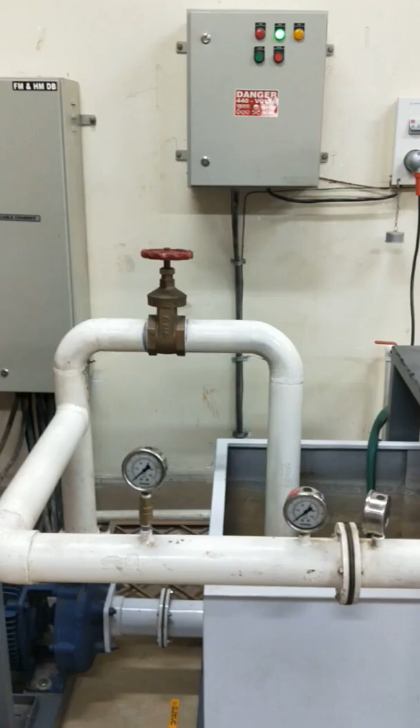So here is your machine. First of all, check the main switch position. It should be in off position. Then fill up the tank with water and ensure that at least 75% of total volume of tank should be filled with water.

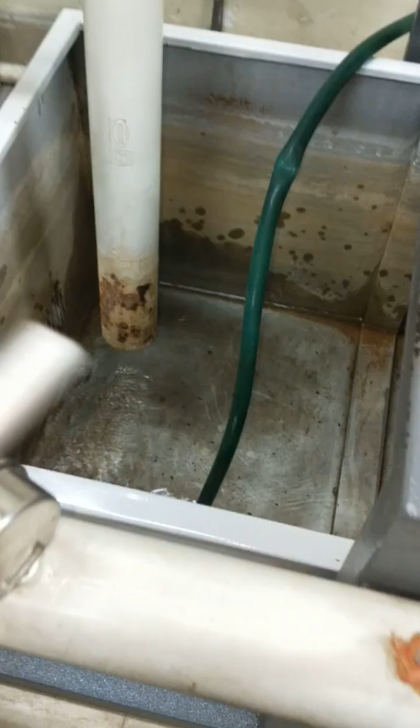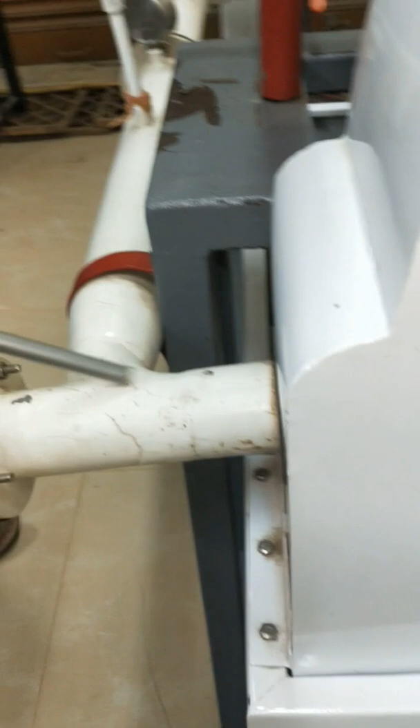By controlling this spear wheel, we can allow maximum amount of water to flow through this nozzle section. This is a spear wheel, and we can control the flow of water through nozzle by controlling this spear wheel.

And this is your bypass valve, and it should be kept fully open during the start of your experiment. And here is your observation table. For first reading, this one is P head or pressure head. We can get these values from this pressure gauge.

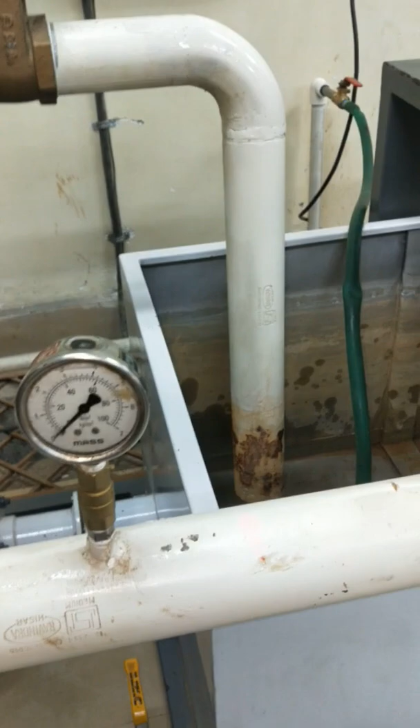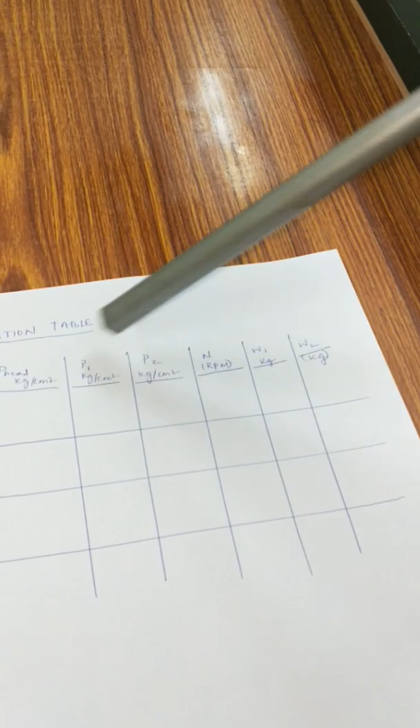And then your P1 and P2. These values, P1 and P2, we can get from these pressure gauges at the inlet of the orifice and at the outlet of the orifice. And then your RPM, speed of your turbine. RPM, we can take this reading by using a tachometer at this point.

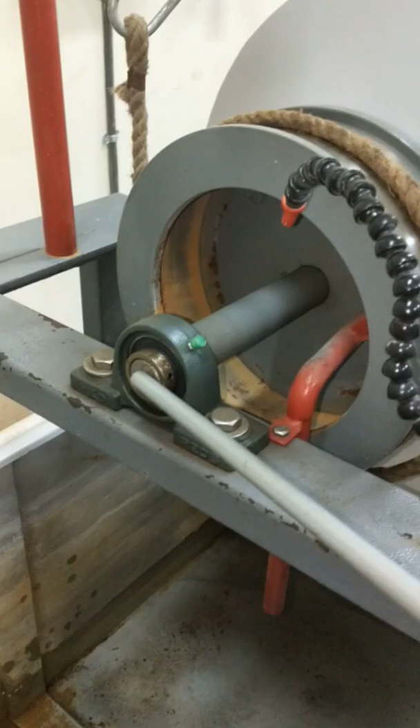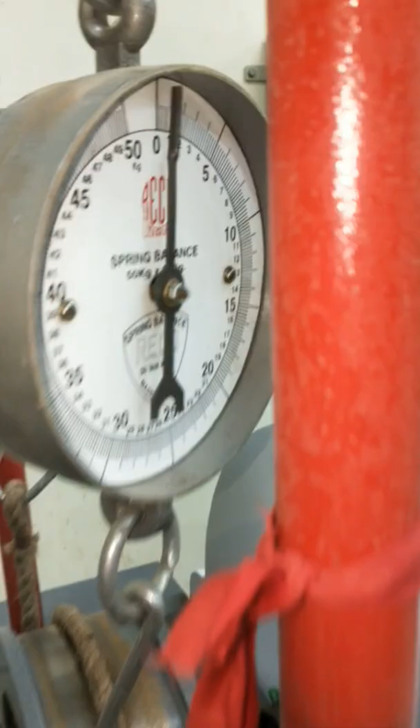And then your load part, W1 and W2. W1 and W2, we can get these readings from this spring balance or your rope brake dynamometer. This value will show W1 and this is W2.

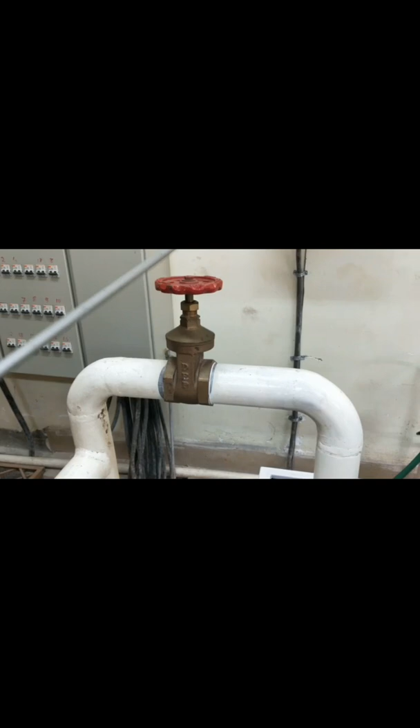So here is your machine. You can see the tank has been filled with water, and the main switch is at off position. And keep this bypass valve fully open during the start of your experiment. Keep this bypass valve fully open.

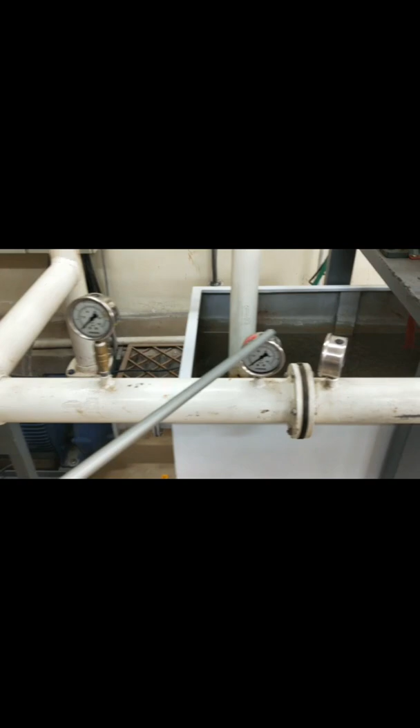Now we will take readings of P1, P2, and from here your RPM, W1 and W2 for 3 different pressure heads. This pressure head can be changed by controlling this bypass valve. So here is your observation table. And now we will start the machine and take 3 different readings.

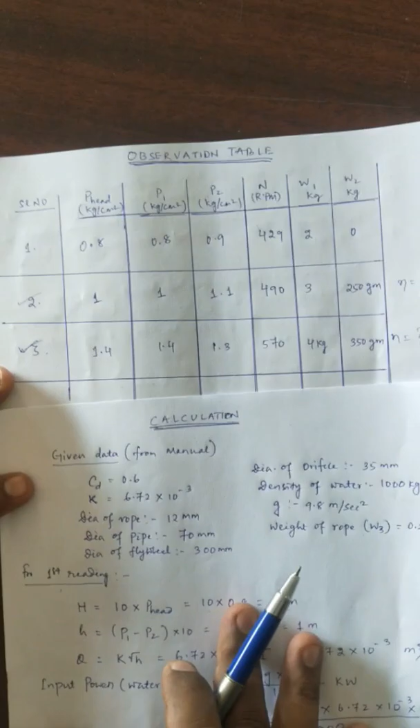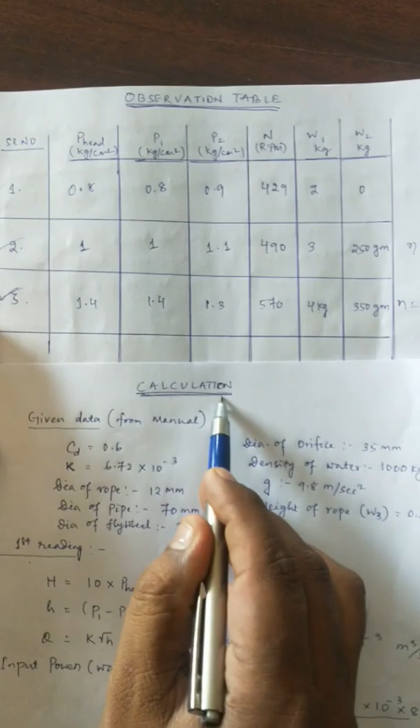So here is your observation table. We got these readings from conducting this experiment, and here is your calculation part. For reading 1, for serial number 1, here is your calculation part. These are the given data: CD 0.6, K value 6.72 × 10^-3, diameter of rope, dia of pipe, dia of flywheel. These things are already given in your manual.

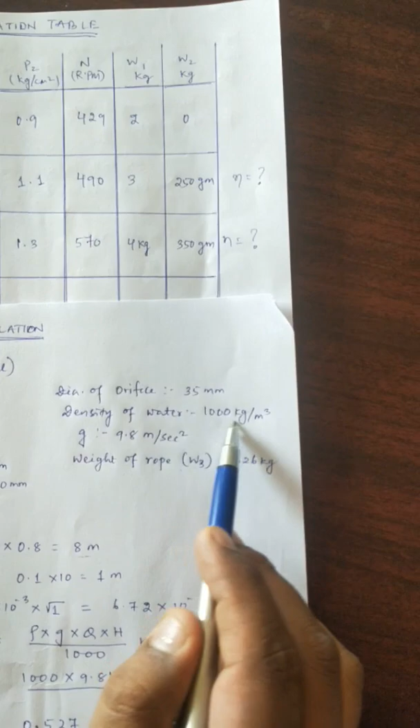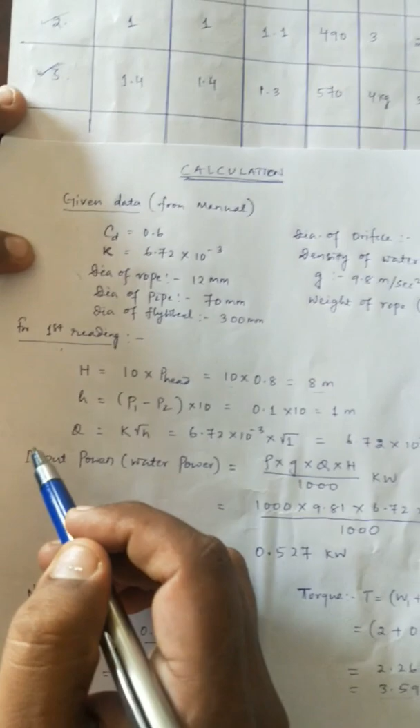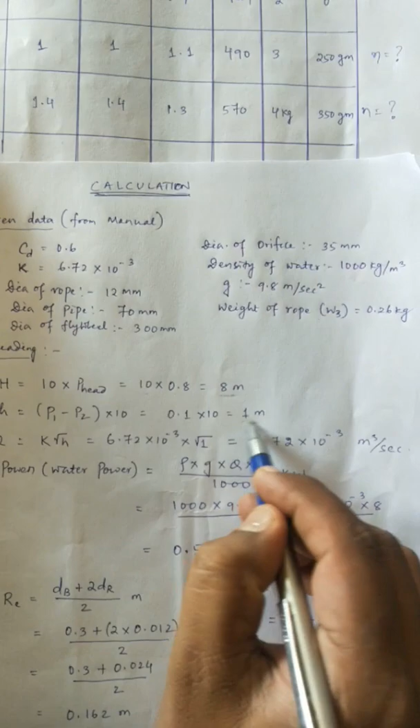The diameter of orifice and density of water, you already know that, 1000 kg per meter cube. Value of g 9.8 meter per second square, and weight of rope given as 0.26 kg. So for first reading we calculated H value, pressure head value, found out to be 8 meter, and next H value we found out to be 1 meter, and next Q value, that is K √H, putting the value of K, 6.72 × 10^-3 × √H. So Q is found out to be 6.72 × 10^-3 meter cube per second. This is your discharge.

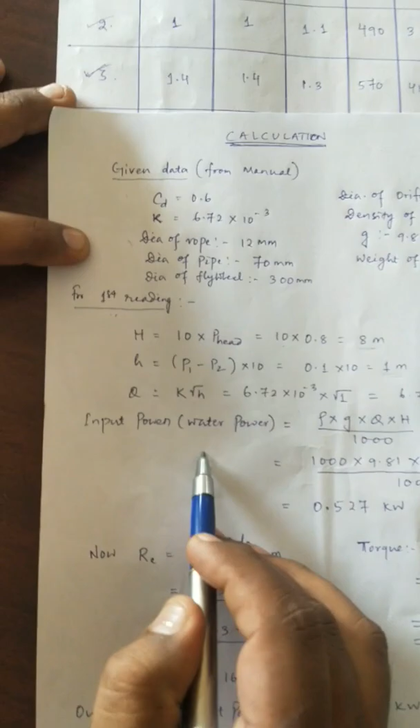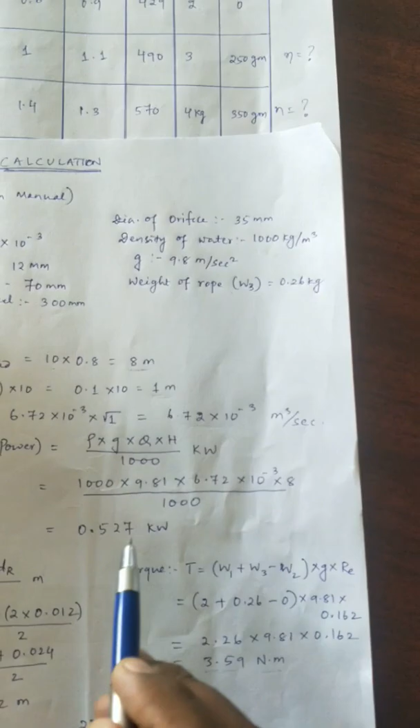Then input power: for calculating input power, there is a simple formula, ρ × g × Q × H / 1000 kilowatt. These things have already been taught to you in your classroom. For ρ, this is 1000, g value 9.81, Q 6.72, H value 8. By putting these values, we get the input power to be 0.527 kilowatt.

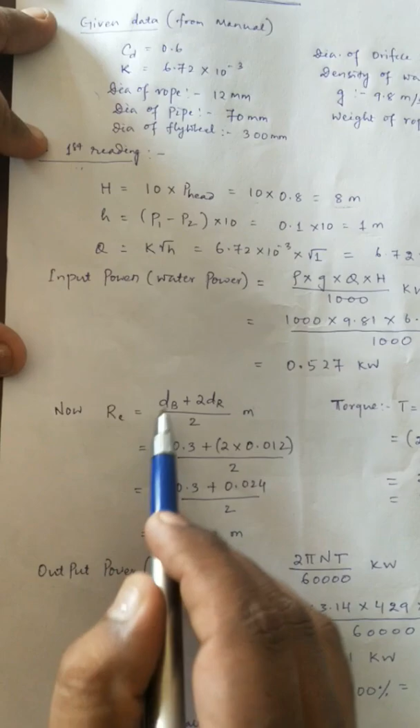Next, for calculating equivalent radius, (dB + 2dr) / 2. I have already shown these things on the blackboard. dB and dr values are already given, that is diameter of flywheel and diameter of rope. And RE, equivalent radius, is found out to be 0.162 meter.

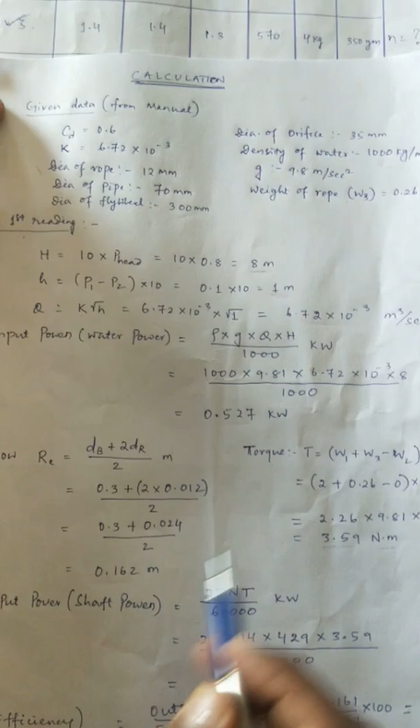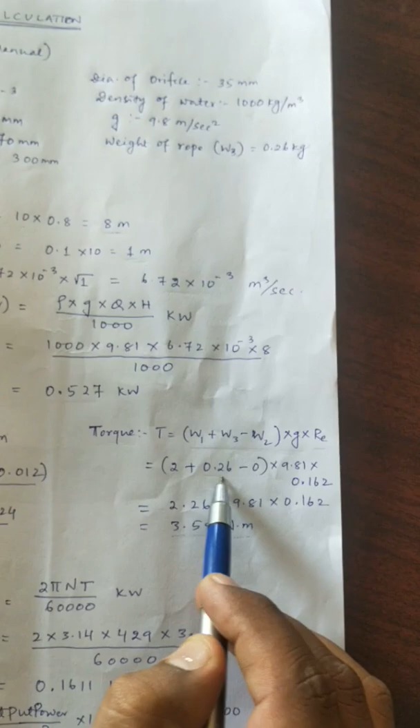Then torque value: to calculate torque, this is the load part, W times g, and RE distance. So from reading 1, you got W1 2 kg, W2 0 kg. So we now put these values: W1 2 kg, W2 0 kg, W3 0.26, that is weight of your rope. Then g value 9.81, RE value we already found, 0.162. So putting these values, we got torque equal to 3.59 Newton meter.

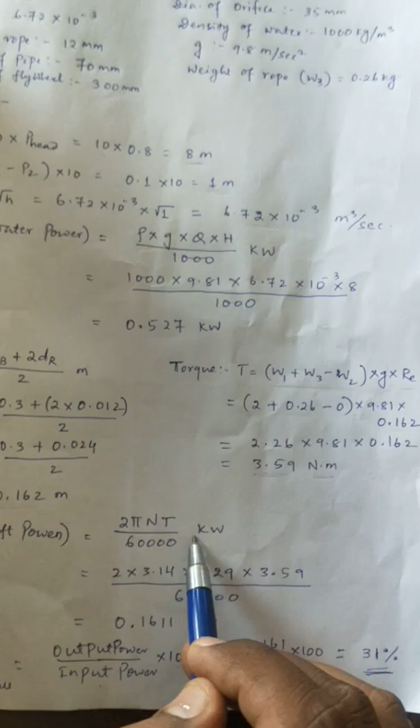So now to calculate output power or shaft power, 2πNT / 60,000 is a simple formula. 2 × π × N, value 429, from your first reading. So N equal to 429. T value we already found, 3.59. So by putting these values, we got shaft power or output power equal to 0.1611 kilowatt.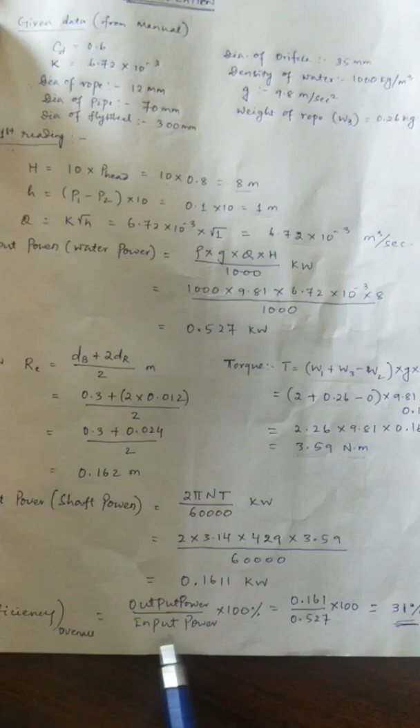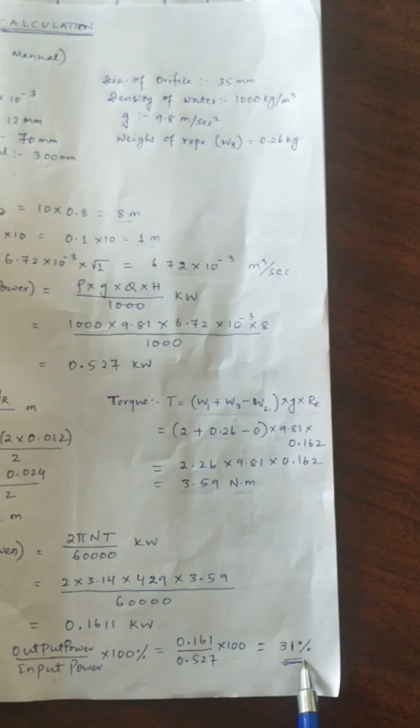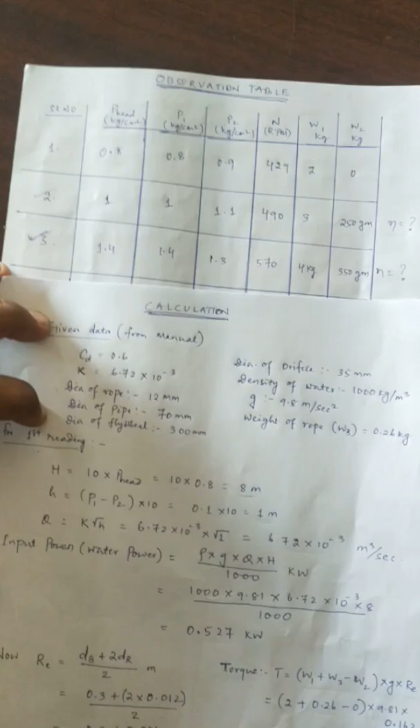So now to calculate overall efficiency, we simply take output power by input power into 100, that is 0.161 / 0.527 × 100, equal to 31%. This is for first reading. Similarly, you have to calculate the efficiency for second reading and third reading. By similar procedure, all the calculations are same, but you have to find out the input power and output power and then efficiency for these two readings. Okay.